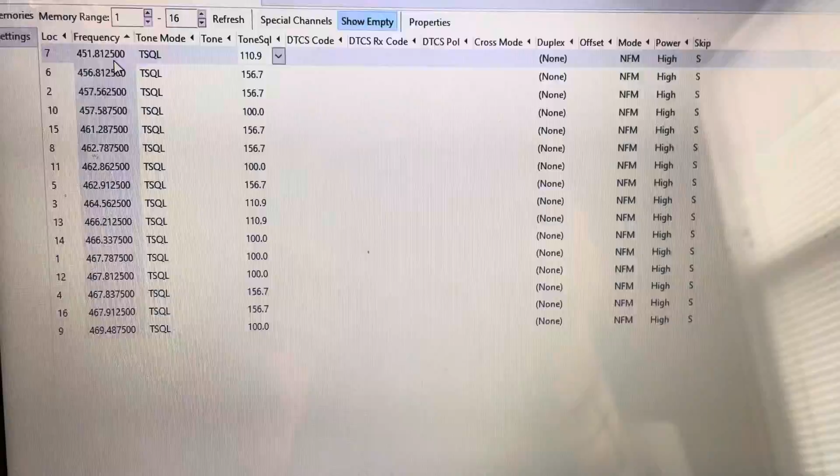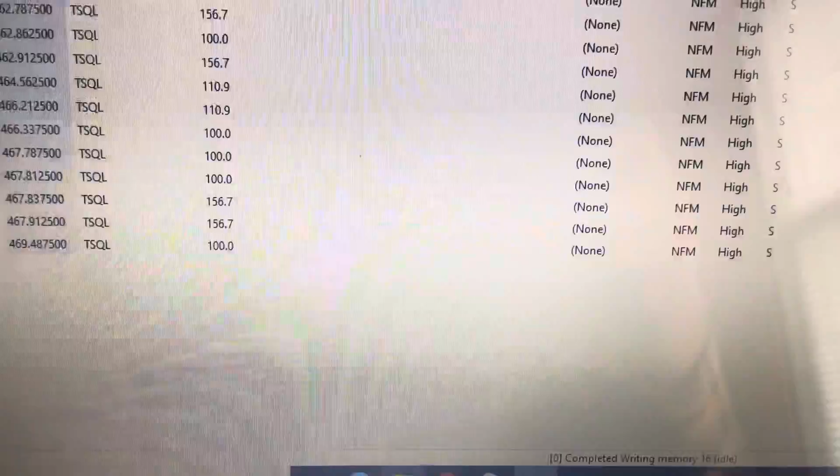Okay, so we're back talking about programming generic 16-channel UHF handhelds, like the GA-2S, the Baofeng BF-888 series, the Luiton LT-458, Arcshell AR7. There's a whole bunch of other names for them, but they're 16-channel UHF radios.

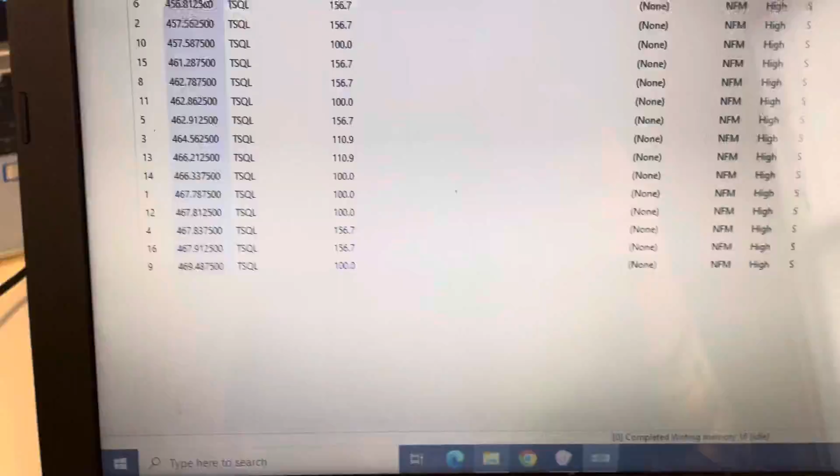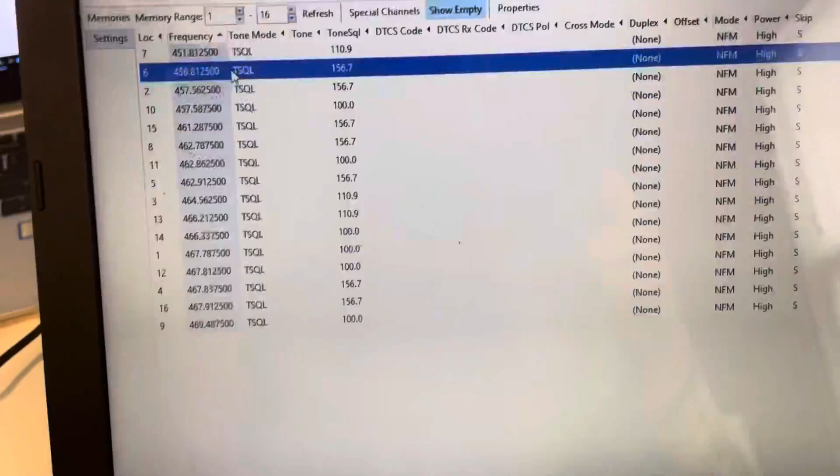Some of them only do the FRS frequencies. Others are just 400 to 470 or 400 to 480. So right now we're talking about programming these radios on the UHF business band, the itinerant frequencies. These are the low power frequencies that are commonly used for business band.

So we've got a cheat sheet here. I kind of want to avoid using the big boys, which are the big ones, 464.5, 464.55, if you can. These frequencies are also very popular. But there's a whole bunch of other low power frequencies available that are not nearly as popular.

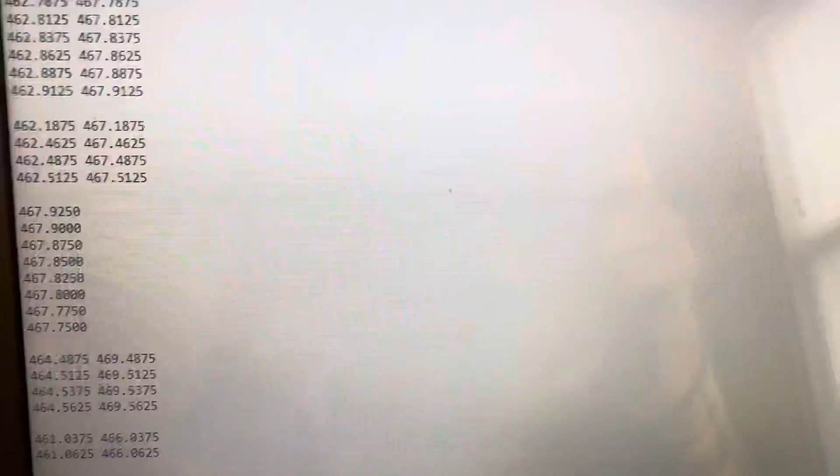Now what you need to do is a frequency survey, a frequency use survey. What that consists of is literally parking a receiver on a frequency with the squelch open, like that. So you're considering using, I don't know, 464. Let's use one of the frequencies I have in the example channel code here.

Channel 1 I've got as 467.7875. You don't have to do it with the squelch open the whole time, but it's a good idea to park a radio on the frequencies that you're going to be using, and just listen, because there might be other folks using that frequency and you don't know it.

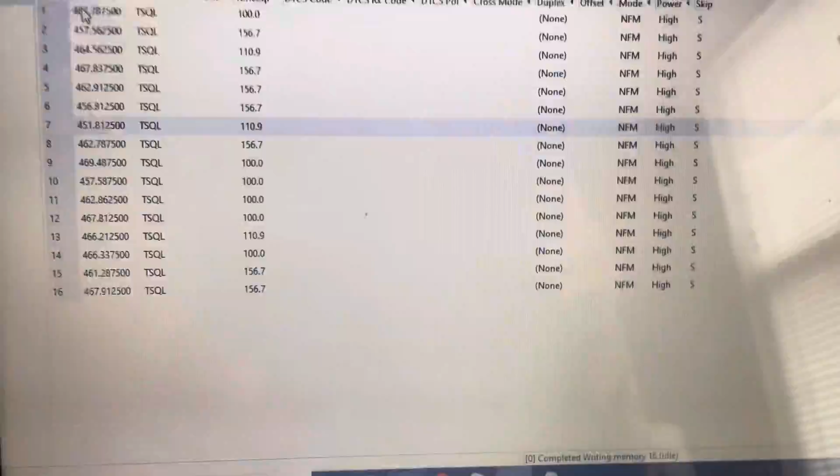You want to do it during regular business hours, during the week, if that's when you're going to be using the radio.

Then you want to go ahead and put together a channel plan. Now, there's a couple different ways you can do this. You can do 16 unique channels, different frequencies, pulled from pools.

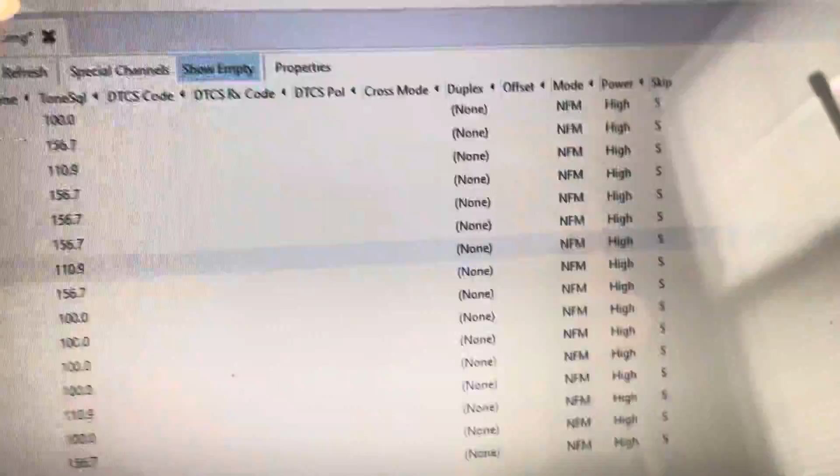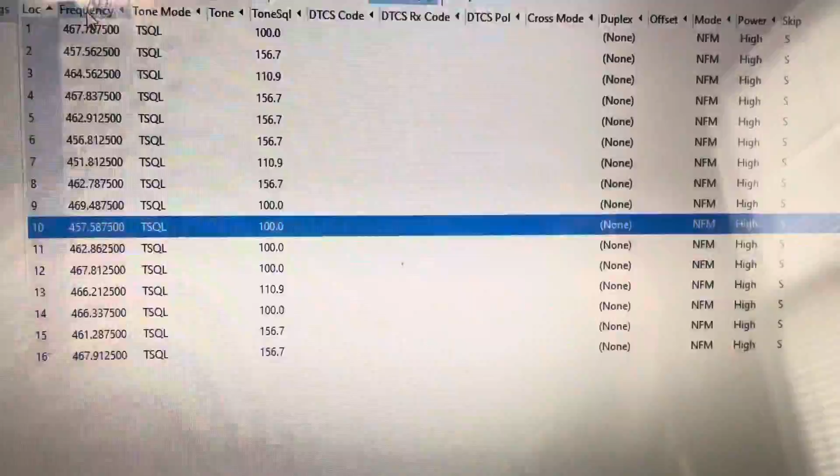You can put in some of the FRS frequencies if you want. It's just important to know which frequencies are in use in your area, and you don't want to use those if you can help it. You also want to figure out what tone or code squelch is being used, and we'll talk about that in a second.

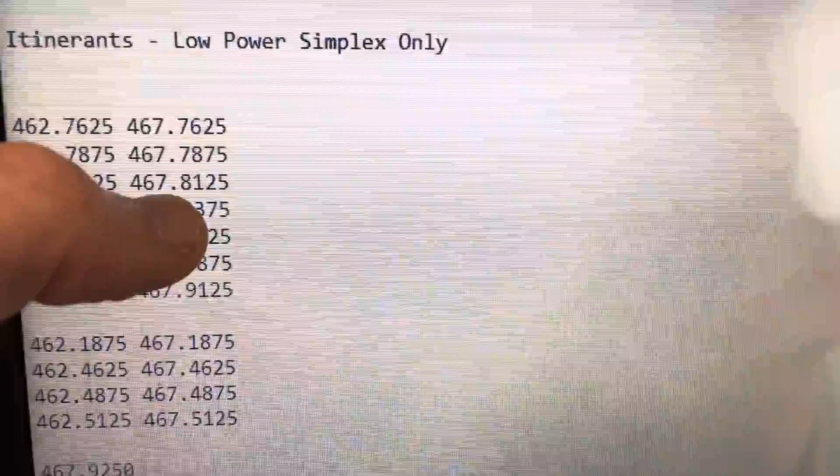So once you figure out which frequencies are being used and which ones aren't, a little hint here is there's a lot of these, like 467.925, 467.9, 467.875. Those are popular. But the in-between channels like 9125, 8875, 86, these ones with 467.8125 and 7625 are pretty popular. But these ones are not nearly as busy usually.

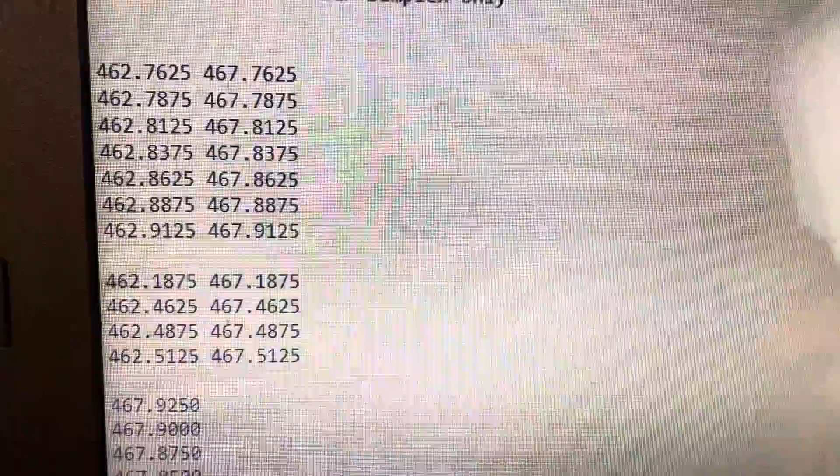And then there's also 1, 2, 3, 4, 5, 6, 7, 8 additional frequencies just on 462 and 467. And then you have these, which are simplex only. They're all simplex only, FRS, and then some additional ones there.

So you just want to know who's using these frequencies, who's using the frequencies next to these frequencies. There's a nice little caveat here with these 462 frequencies.

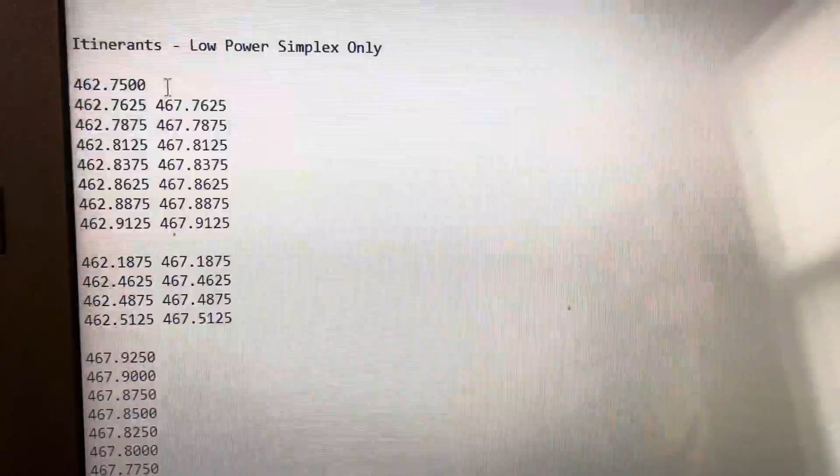The frequencies in between here, so, you know, 462.75, those frequencies, 462.8, 462.825, I would avoid those. They're used for on-site paging, and they are still used.

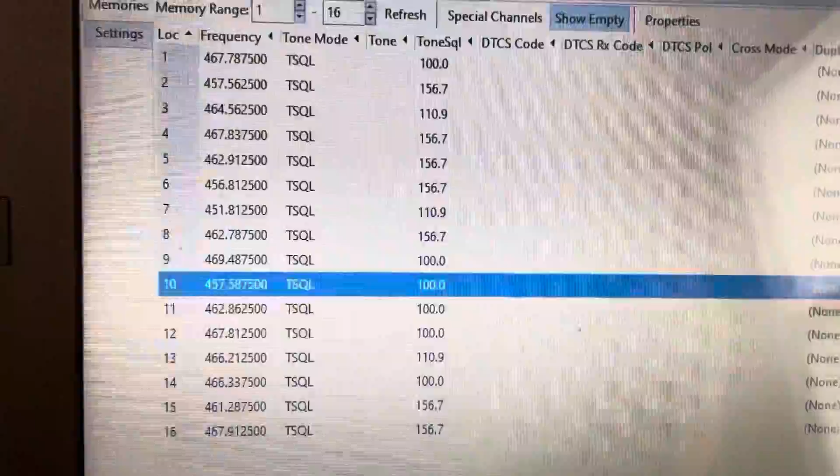The other ones, 467.75, 775, 825, these are popular at Target. These are part of the Target standard plan. That's Target channel 1, 467.75. Also, the coaster call, the on-site pagers for restaurants, 467.75.

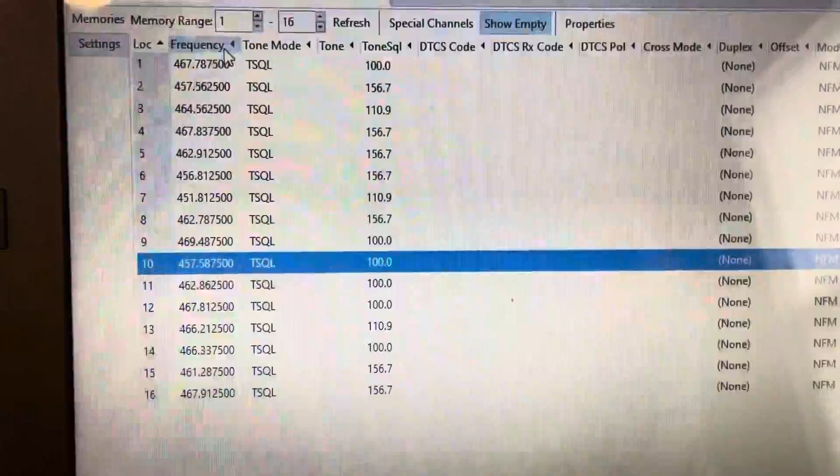So if you're near either of those two things, which you'd find out by parking a radio on that frequency, 467.75, I wouldn't use that frequency. You know, 467.7625, that's different. Again, this is also all going to be narrow band, narrow mode, NFM.

So then you want to put together a frequency plan using the vacant frequencies in your area. And do this organized by frequency. And make sure that when you have channels that are next to each other, you're not using the same PL tone. I mean, you don't have to do this. You can use the same PL tone, same tone squelch, for every frequency if you want to.

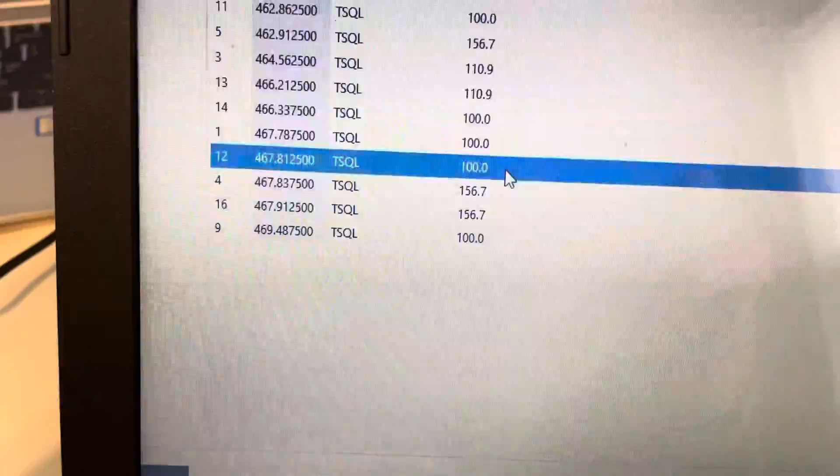That's up to you. I would avoid using 67.0, 77.0, 82.5, 85.4, 88.5, 94.8, because those are default tones. 67 is the big default.

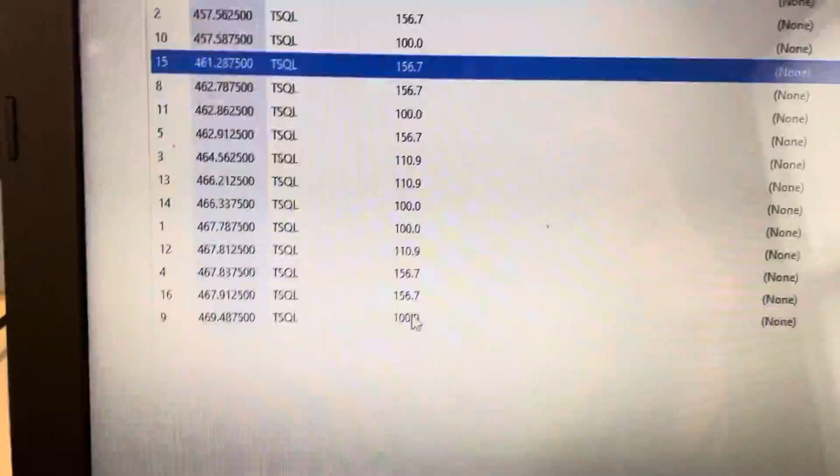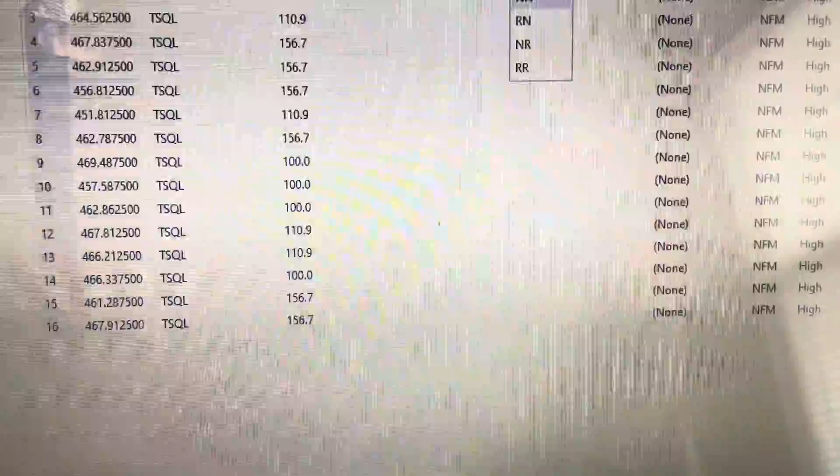If you go with DCS, which I've got a whole thing about that we're not even going to get into right now, don't do the stupid inverted polarity junk. Don't do that. Just do normal. Don't do that, because that just opens up all kinds of problems with falsing. And someone's going to chime in maybe on that, but that's okay.

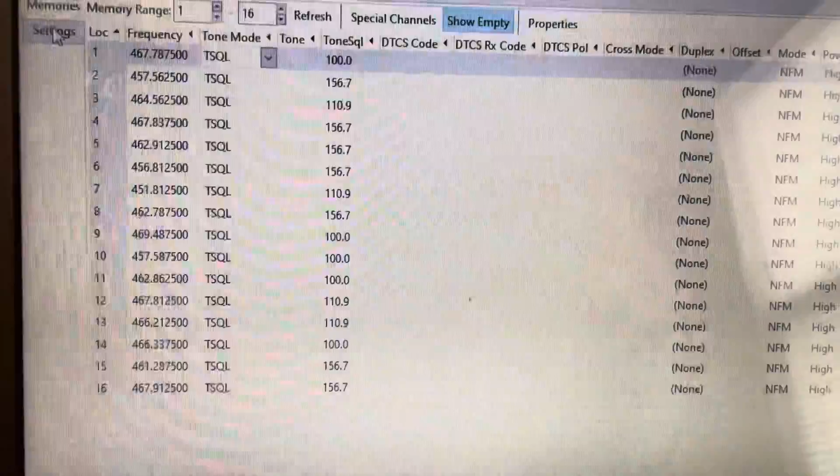I recommend disabling scan. You can have the timeout timer, I do recommend leaving that on. 60 seconds is a good one, 30 seconds is a good one. Just, you know, because eventually someone's going to sit on their microphone. It's just going to happen. So like I was saying, with the channel plan, there's a couple different ways you can do this.

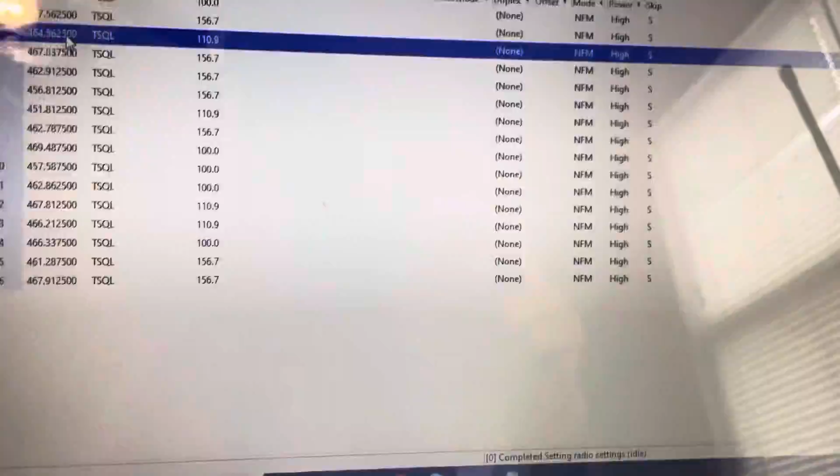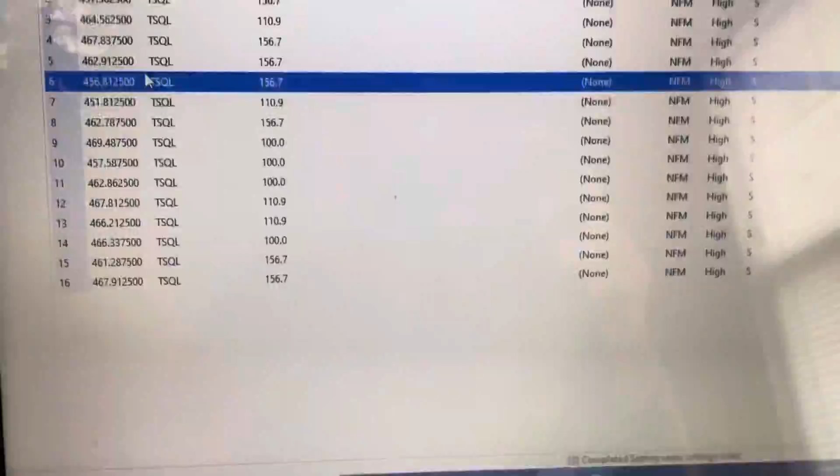You can do 16 unique channels, or you can do 8 unique channels and repeat it again. So channels 1 through 8 would be at low power, and channels 9 through 16 are the same frequencies and tones at high power. This is something you've got to dial in based on your specific application, but this is an example. I've done 16 unique frequencies and sorted by frequency to be double sure I'm not duplicating a frequency somewhere.

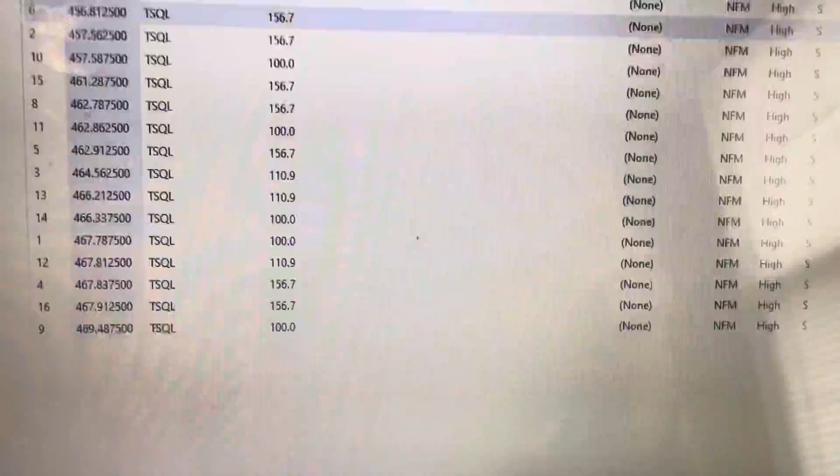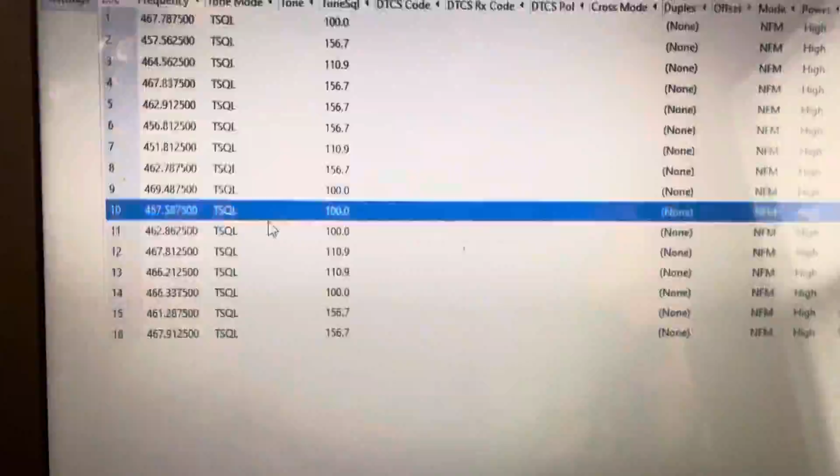Working with 3 different PL tones. If that's how you want to do it, that's one way. I recommend doing it in whatever way makes you comfortable. If it's too confusing to use more than one tone, just use one tone. But you need to know what tones and DCS or DPL codes are used in your area, so you don't end up by chance using a tone that somebody else in the area is using. That's a good way to have a bad time.

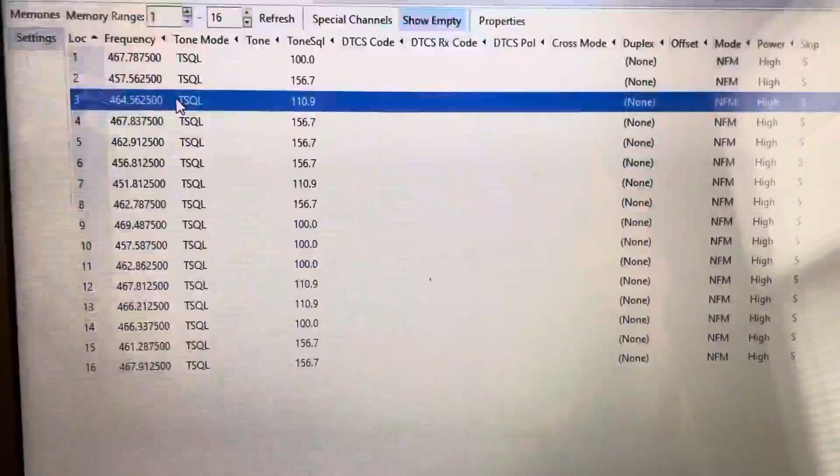These are actually not bad radios, you know. For what they are, for the price, they're good. They get the job done.

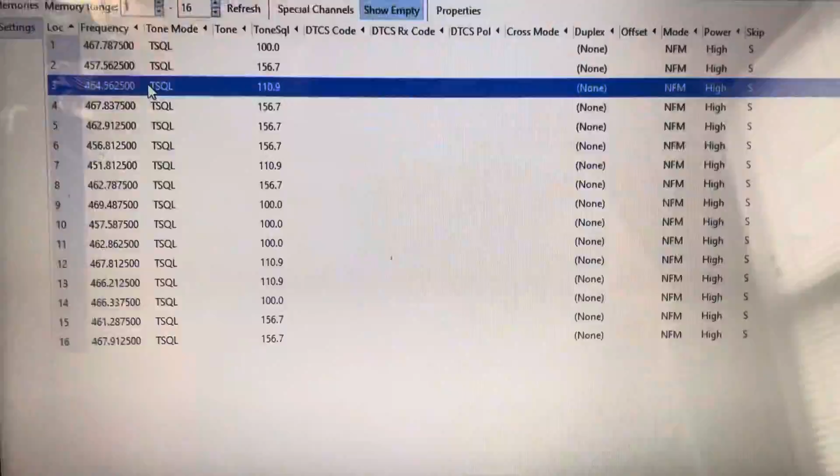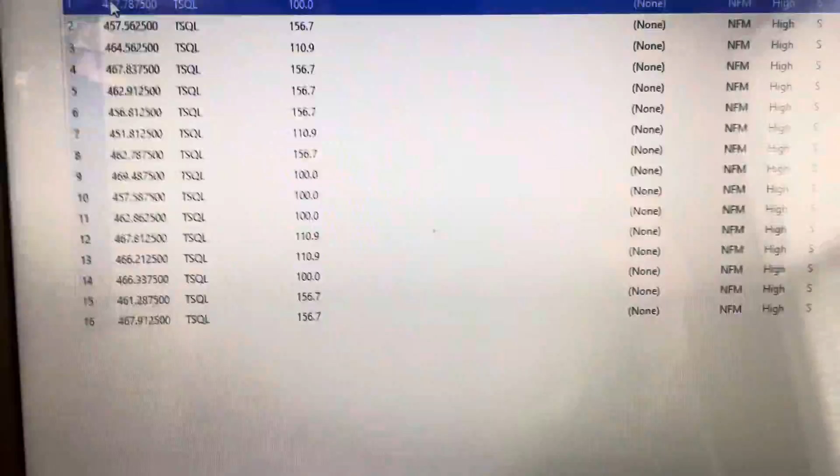I recommend turning off scan, using tone squelch, or DCS if you're so inclined, if you really have to. You could just as easily, and I've done other videos on this, use the FRS frequencies. You've got 22 to work with to fill in this channel plan, and use it for business use. That is legal. You don't have to have a license. You can use the FRS channels for business use. It's legal, period.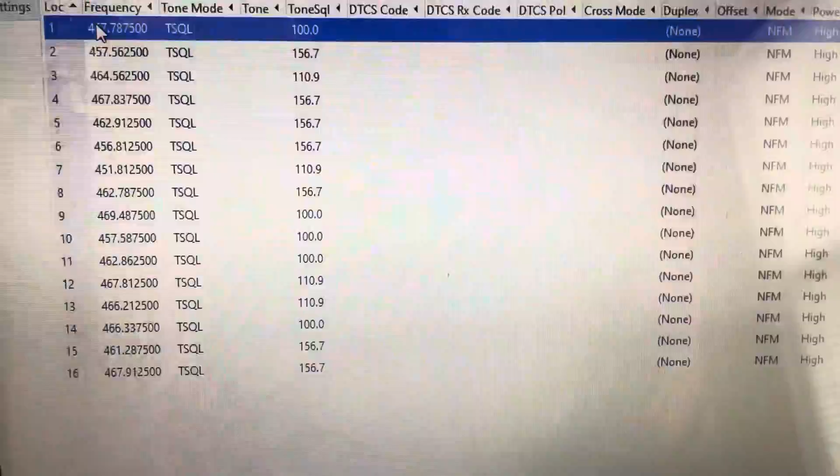Now, these radios technically aren't type certified for Part 95 use, but identical radios with the frequencies locked in are. So the only difference is the power level on channels 8 through 14 is limited to 500 milliwatts, low power. That's really it.

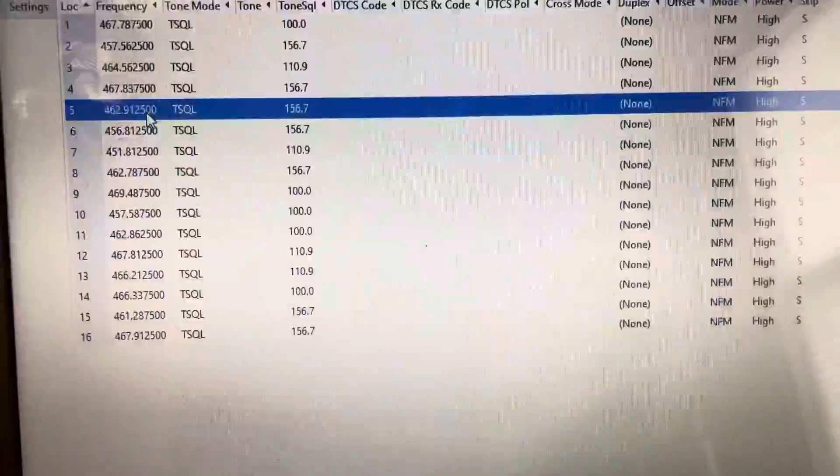You don't transmit on the repeater input, ever, unless you're using a repeater. That's it. It's pretty straightforward.

It's important to look up - you can find websites that have the default frequencies for Motorola, Kenwood, Baofeng, you name it - the default out-of-the-box frequencies for those radios. Some of them are legal, some of them are not. So it's important to know what you're working with.

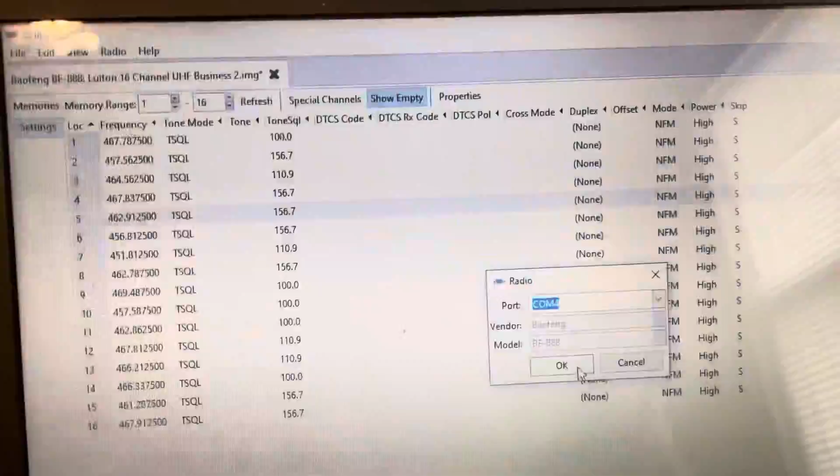The out-of-the-box frequencies for the GA-2S radios, for example, aren't legal business frequencies. They're within 450 to 470, but you can't just pick a frequency and go. So that's something to consider.

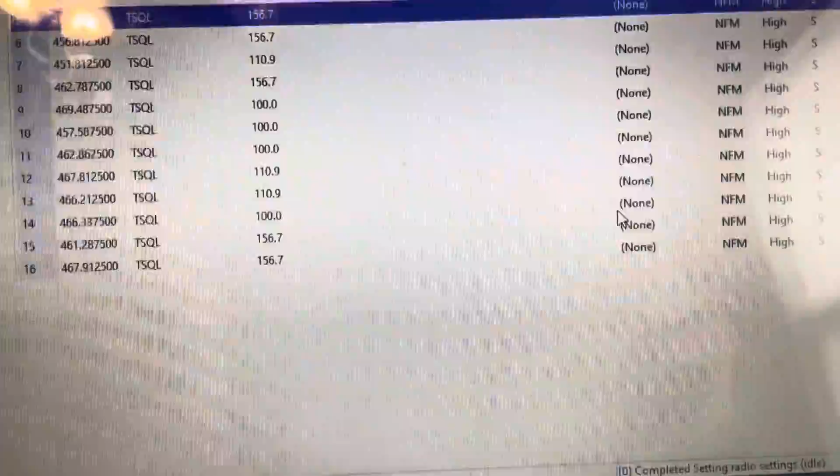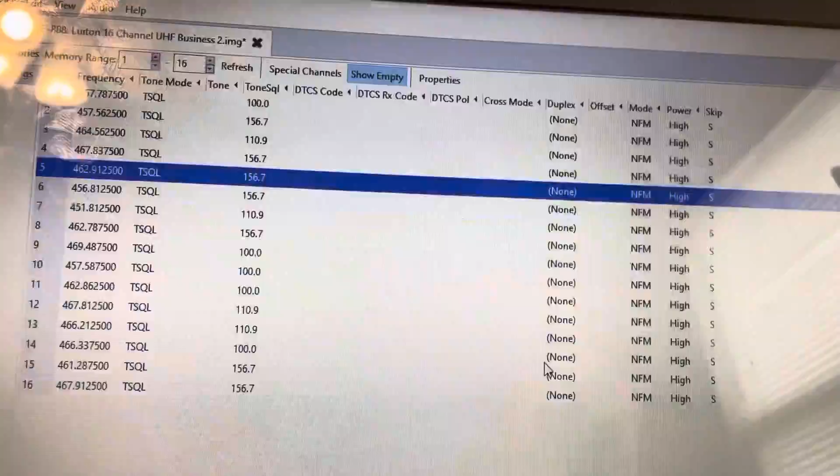That's pretty much it for the programming, we've gone over that. If you guys want, I can make another video in more detail, but I'm just flashing these radios real quick with this channel plan, and then we'll be ready to go.

It doesn't matter if you bought 2 radios or 200 radios. You need to think about your particular application as far as power output, and do you really need 16 different channels? Because you might, if you've got 200 radios and several different groups that need to be able to talk to each other.

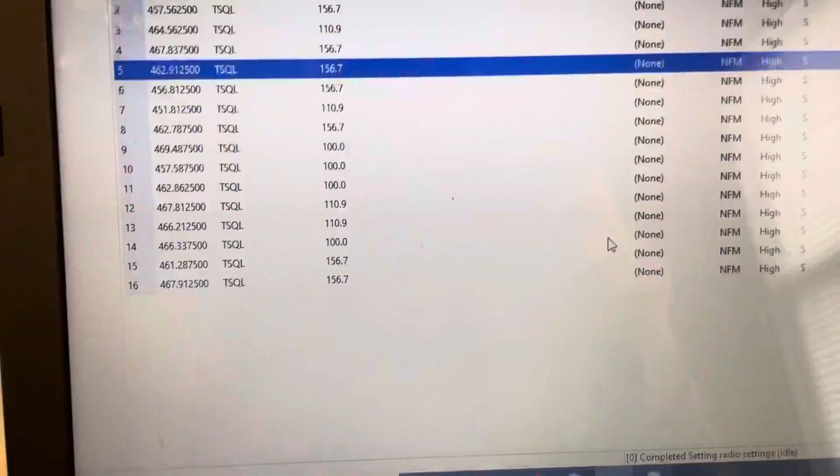Hello, radio check. Take a store, for example. They'll usually have 'hello, 1 2 radio check, 1 2 1 2 radio check.' They'll usually have 2, 3, or 4 channels.

Channel 1 will usually be primary operations. Channel 2 will usually be a talk-around channel for more in-depth conversations, so you don't tie up the main channel. Channel 3 might be an admin channel. Channel 4 might be loss prevention or a second talk-around channel. And then channel 5 is a spare.

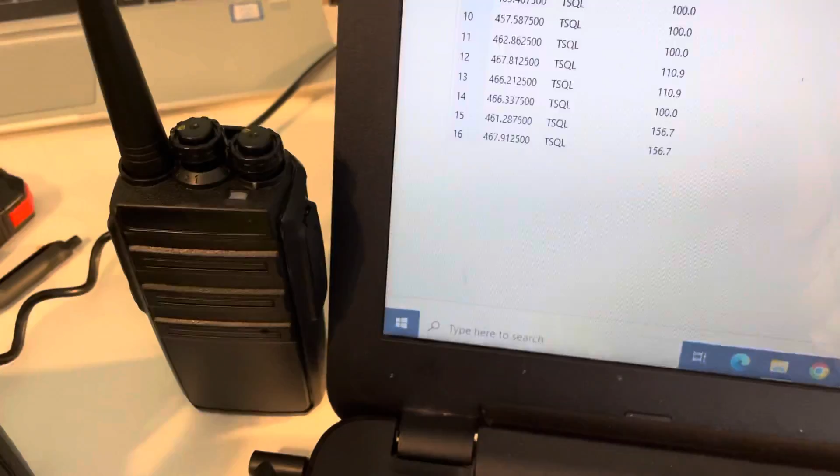It's a good idea - say you really only think you need 1 channel. If that's the case, you need 3: a primary, a secondary, and a spare.

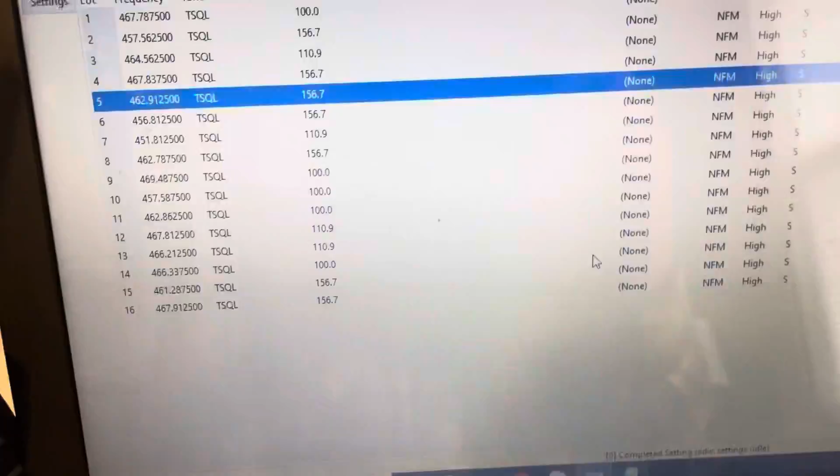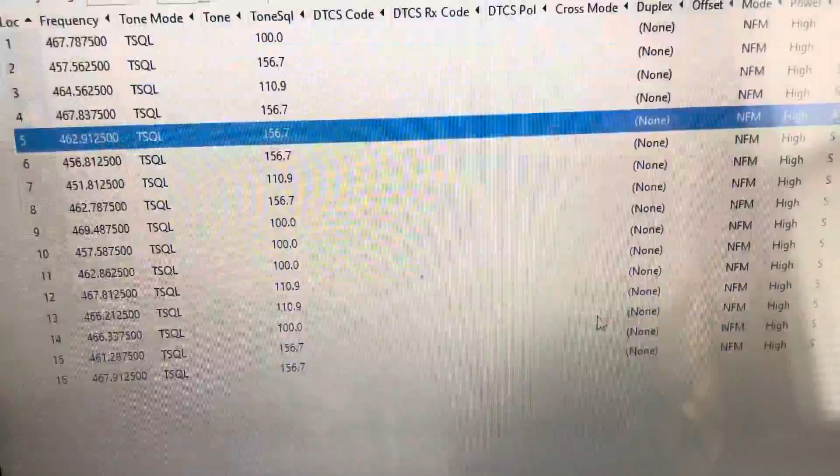Primary, secondary is going to be used if you have something like interference - somebody is using this frequency now because it's an itinerant frequency and someone came into town and is using it. You need to be able to have something to jump back to. And having that third frequency helps for the same reason.

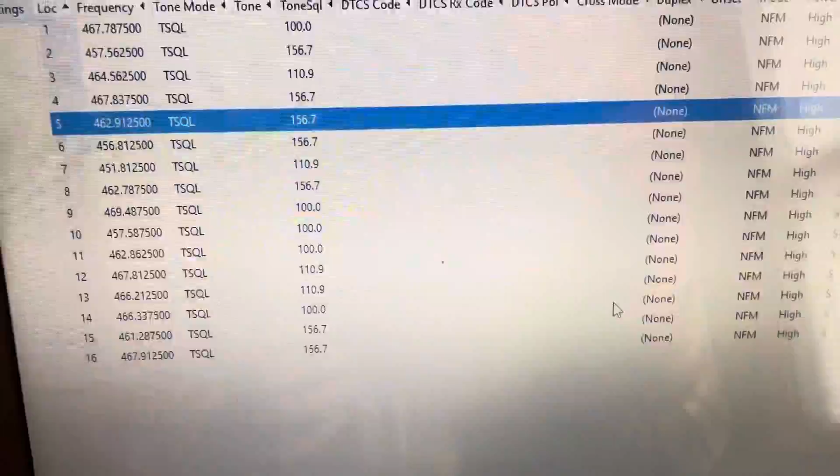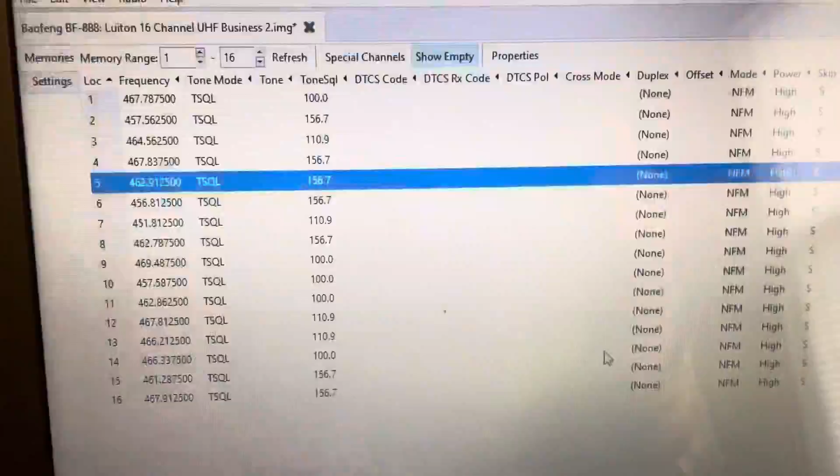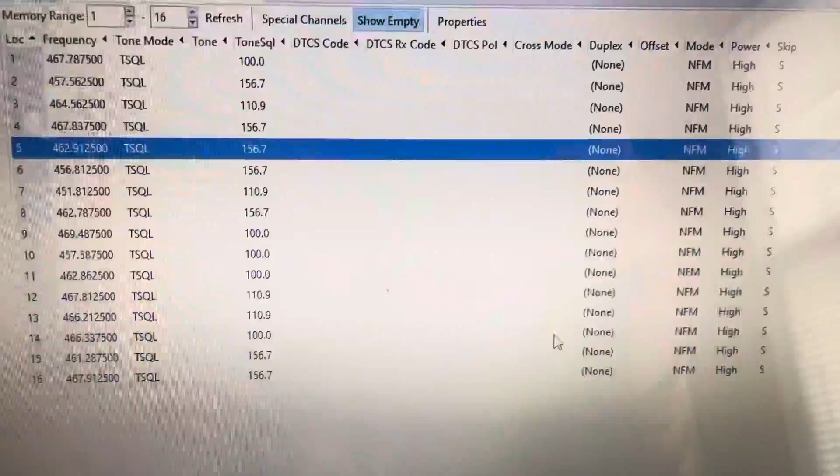Talk-around: if you're working a job site with a bunch of different guys and they all need to talk to just each other and not everyone talking to everyone else, this is a good reason to have 16 unique channels. I can go into that in another video, but for most applications, this is actually a pretty good option - or using the FRS channels and keeping it legal.

Of course, you could just go get a license. That's what I would recommend for the business frequencies. But yeah, that's what you're looking at right there.